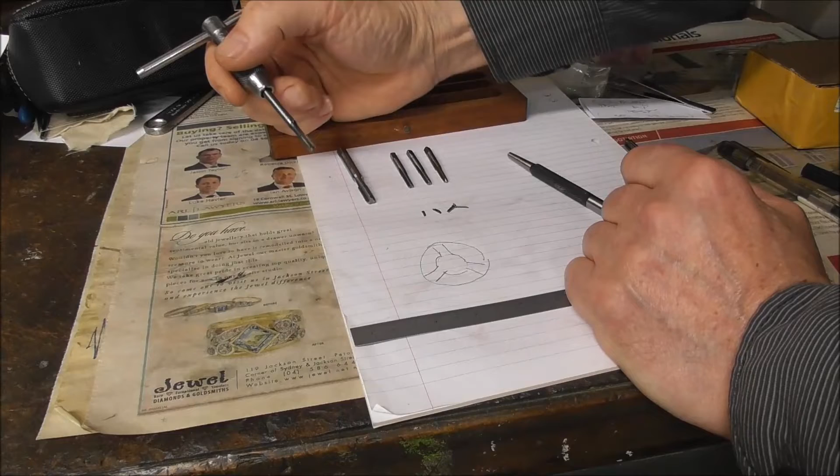Okay, so let's say you've broken a tap, disaster of disasters, and you want to get it out before the boss finds out. The first thing you want to try and do is unscrew it. Obviously, the bigger the tap, the more chance you've got of that.

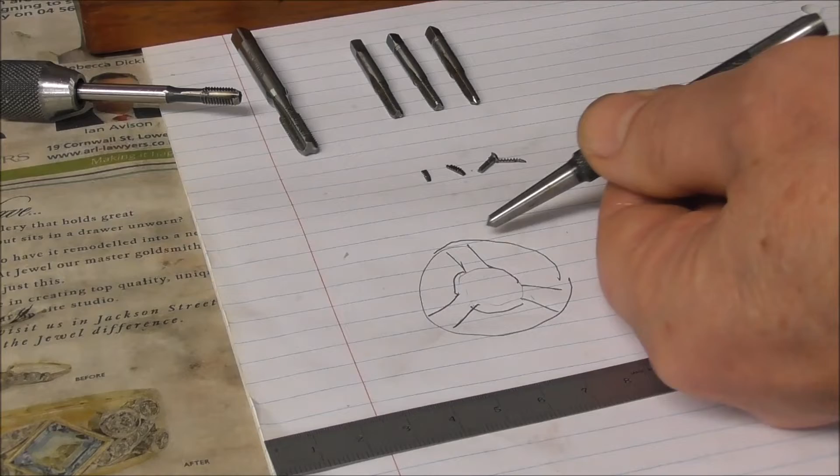So get something like a center punch, let's zoom in on this a little bit, and try and shift it. Just try and tap it at that point there, on each of the flutes, and see if you can turn it. If you can move it, that's a good sign. There's a chance you'll be able to unscrew it.

And if you can move it and it's up near the top - but obviously if it breaks deep down inside the thread and it's well below the surface, you're in serious trouble, and you've either got to throw the part in the trash or get it spark eroded out.

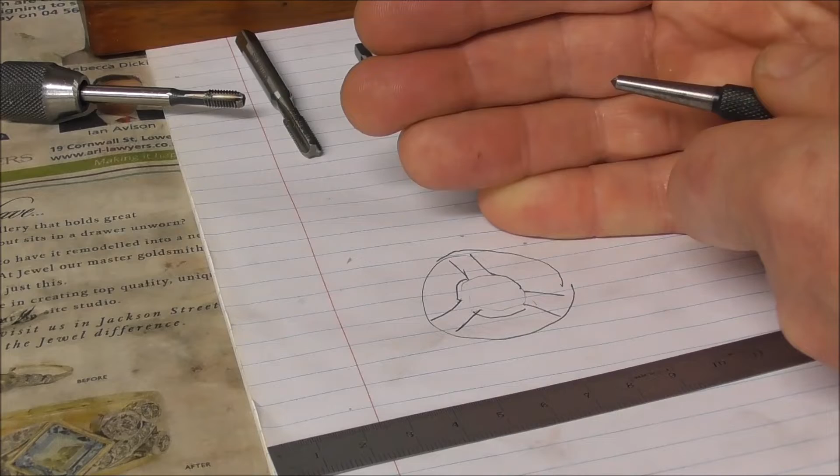But let's say it's up near the top and you're able to shift it slightly, and you can see, well, this could come out. Then you can make a little unscrewing tool. You can actually buy these.

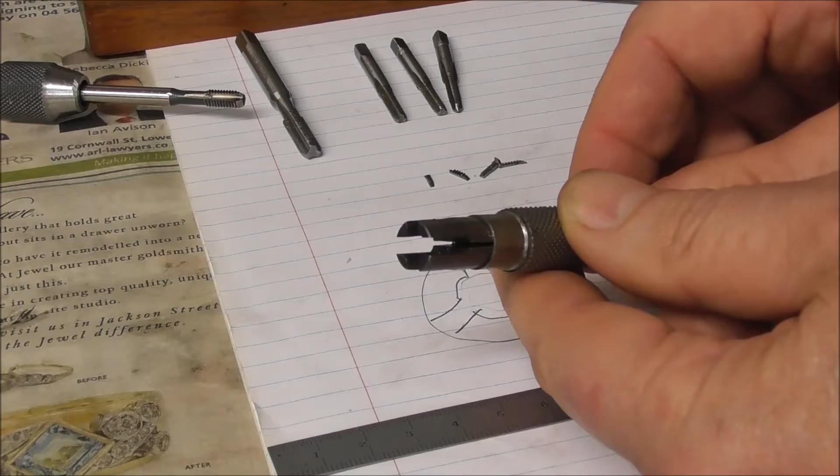I don't know how readily available they are, but this is a kit made by Walton Tools that is suitable for a range of 4 flute taps. You can slip this down into the gaps between the teeth and lock up the little ring, which tightens the collet onto it, and hopefully unscrew it.

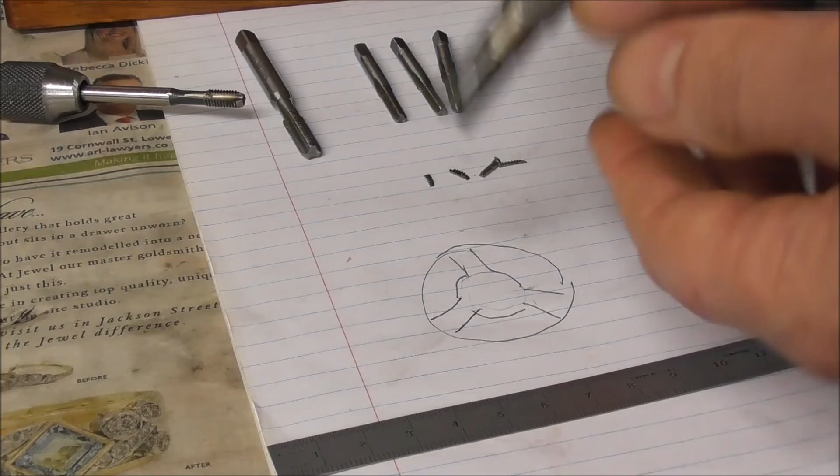But if the tap is below 1/4 of an inch in diameter, that's going to be a big ask and you might not be able to do it. But let's say it's a 1/4 inch tap, borderline, but it's a 3 flute tap.

Well, what you can do - let's see if I can show this here - is make a special extracting tool. Let's zoom in a little bit more. So what we have there is 3 little flutes that go down into the gaps between the tap.

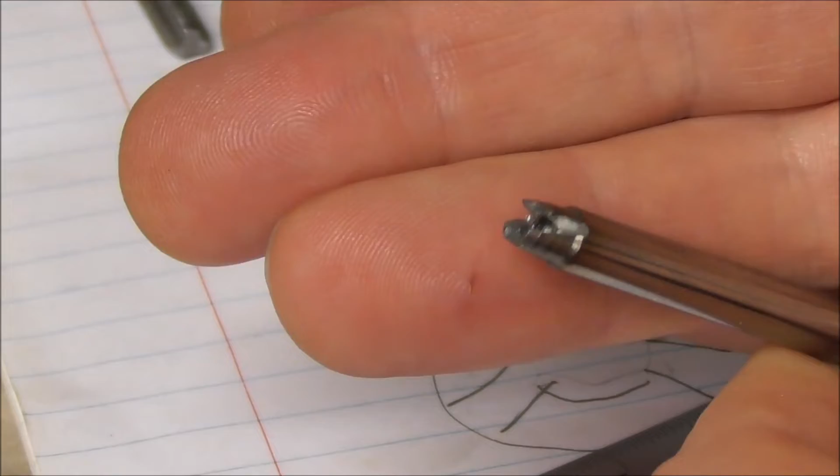Now, you can't just use any old material for this. It needs to be a very high tensile steel. You could possibly use a cap screw and turn it down in the lathe and drill a little hole, the core diameter of the tap.

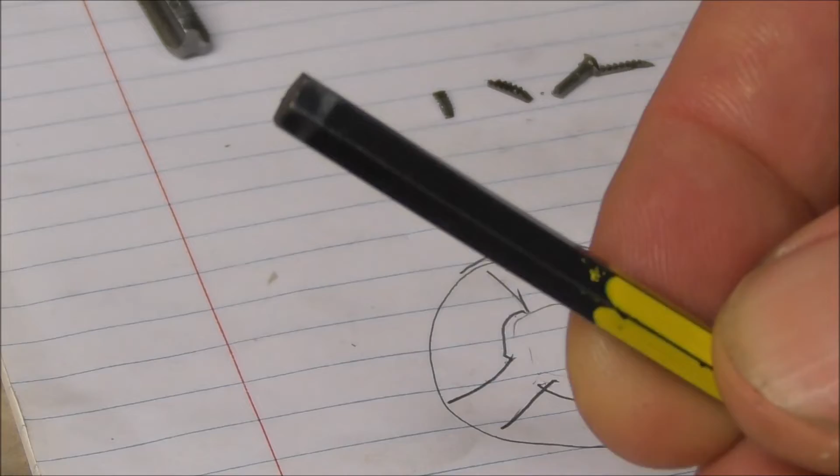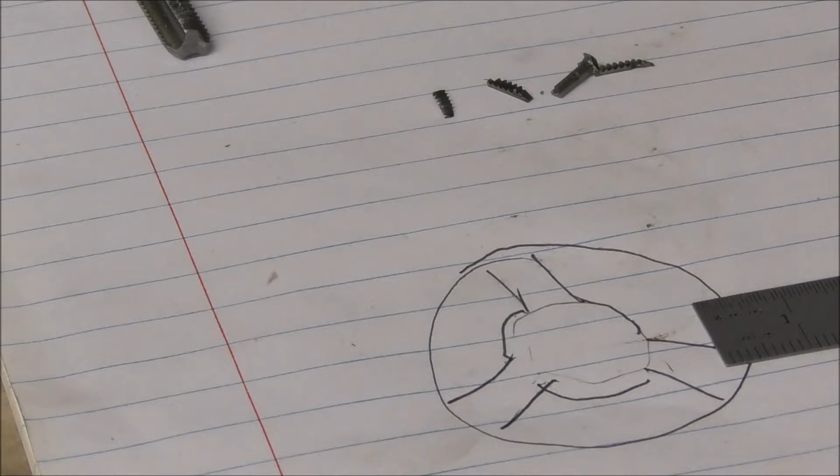But even better would be to get a piece of an Allen key - you call them hexagon keys or Allen keys. Cut it off in the grinder, put that in the lathe, turn it down to the hole inside the broken tap hole, drill a hole in the middle to the core diameter, and then file or grind little flutes so that you have a very strong steel tool that you can insert in around the broken tap.

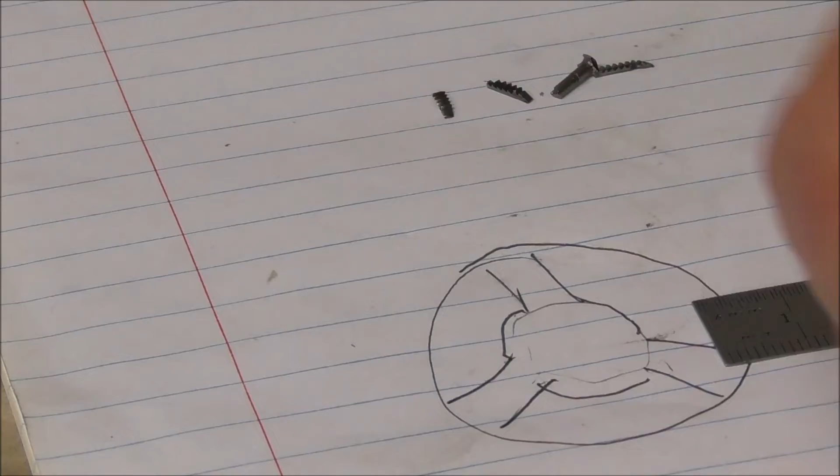Let's just show that now. What we've got we can show - here's a little 6mm tap, and there's a tool I've made to remove a broken tap in the past.

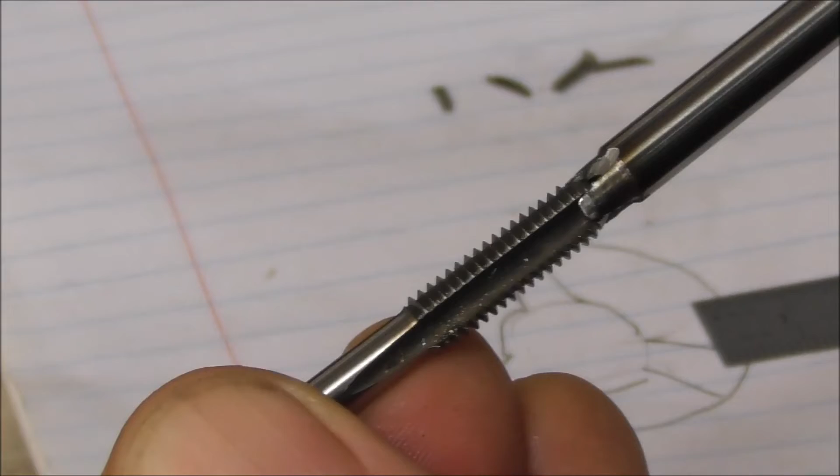Sometimes people bring me broken taps to spark erode out, and the first thing I do is have a go at removing it with an extractor like this. So if it's near the surface and you can tap it and get it to move, it's worth making a little tool like this and tapping it down well into the flutes and carefully, with a bit of downward force, unscrewing the broken tap out.

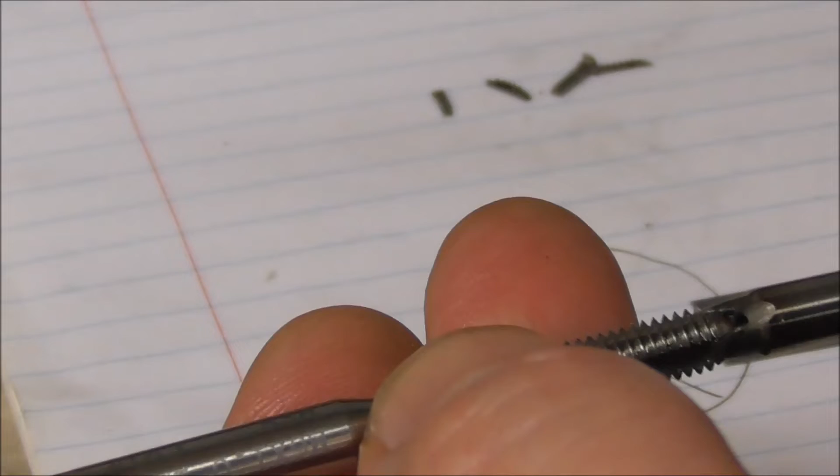And you may need to file or grind that with a little slitting saw or a Dremel to fit either a 4 or a 3 flute tap.

Now that won't work if it's a tiny tap of 3mm diameter, because the problem becomes exponentially impossible as these little flutes on your tool become weaker and weaker. But above about a quarter of an inch, it's likely that you could be successful.

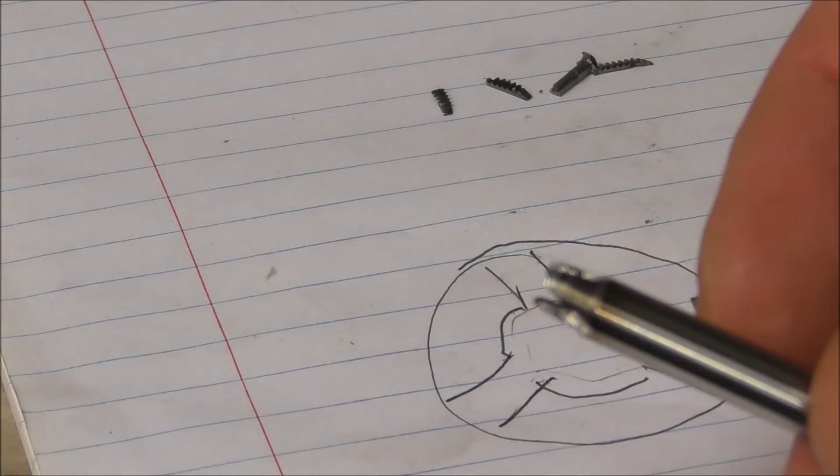Broken tap in an expensive part. It's a nightmare we all dread. We've all done it. I did it many years ago when I was learning the trade of tool making, and I broke a tap in an expensive die, and the lesson was so painful I've been careful ever since, and I don't think I've broken very many taps since that first painful lesson, because they're so difficult to get out.

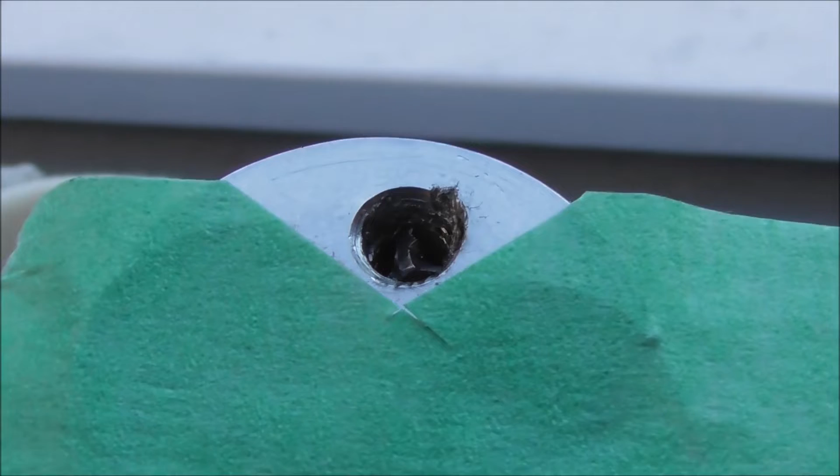This one is a 5mm tap broken deep down inside this hole. The client has brought the part in to have the tap removed because it's a valuable part and he wants to save it. I won't disclose the details of the part or the client because I'm not sure about the IP and I don't want to embarrass him anyway. But I'll go through removing this broken tap now, and it should be quite an interesting subject.

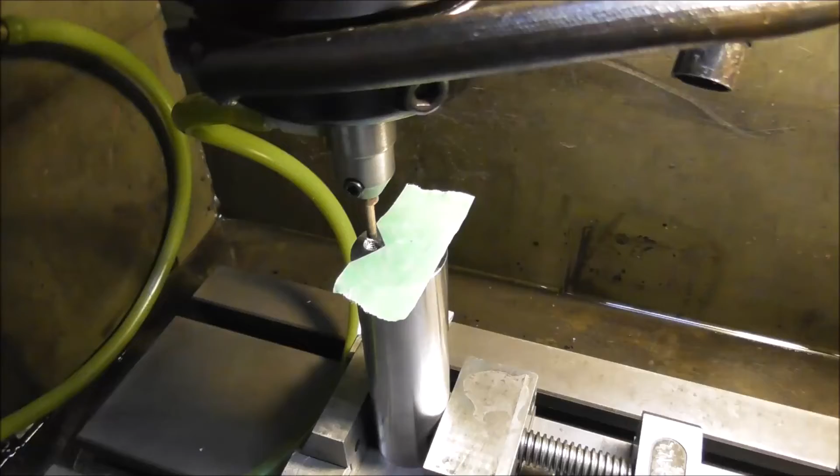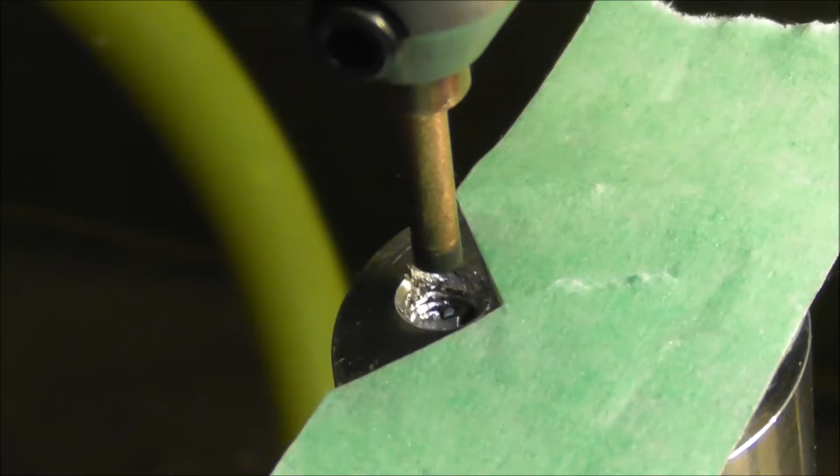Removing a broken tap with a spark eroder is actually not always an easy process. The idea is that you put an electrode in and erode down through the middle of the broken tap to remove the solid core, and then you can just flick the little broken pieces of tap out of the thread. That sounds really quick and easy, but the problem is that the tap's often shattered into little pieces, and as you move down, the little pieces become free and start to short out the tap and interrupt the spark eroding process.

And then you've got to retract the electrode and drain the fluid and try and remove the little piece of broken tap, and then go back to where you were and cut down another millimeter or two, and the process can actually take quite a long time. So I've got no idea how this is going to go. Alright, let's fire it up.

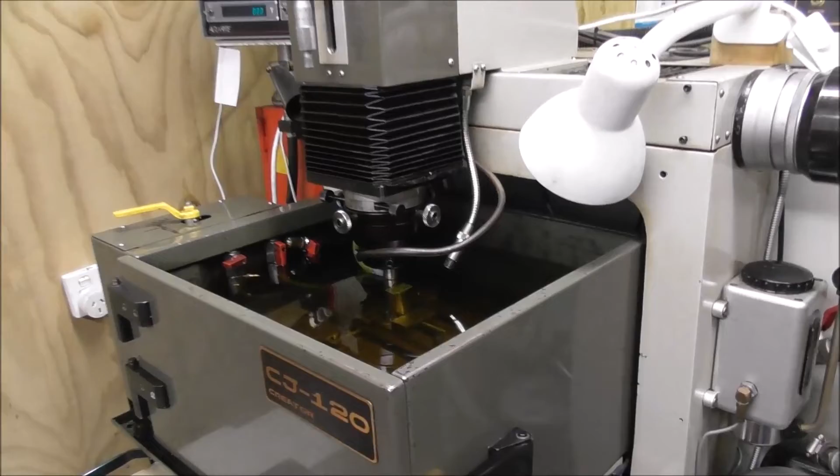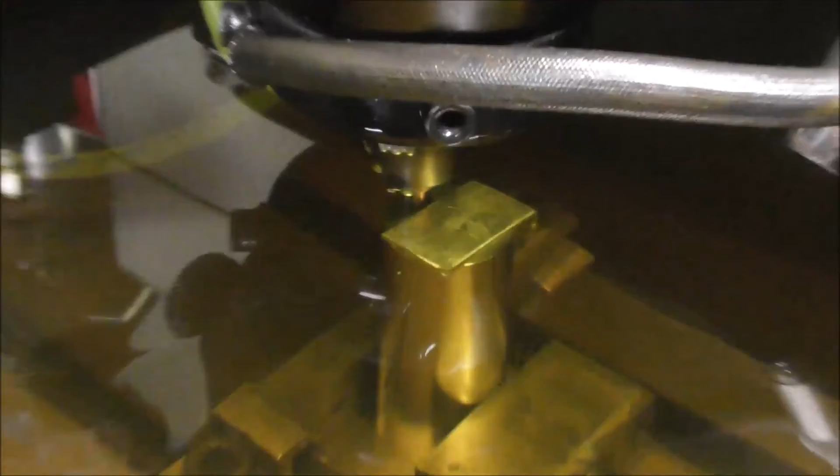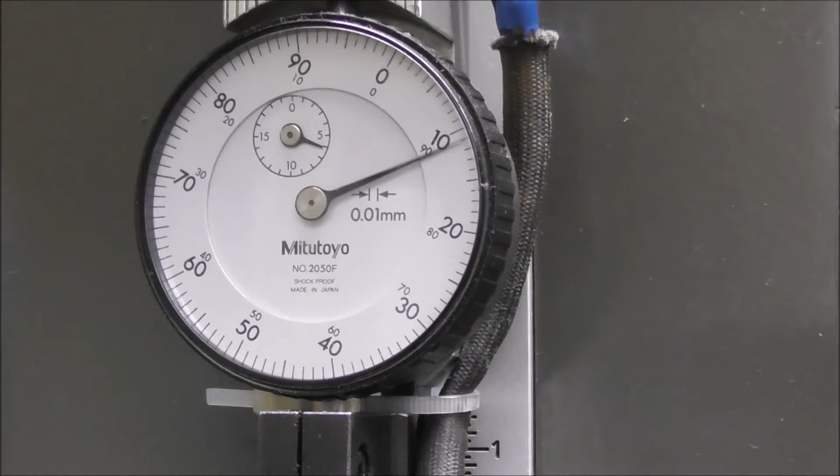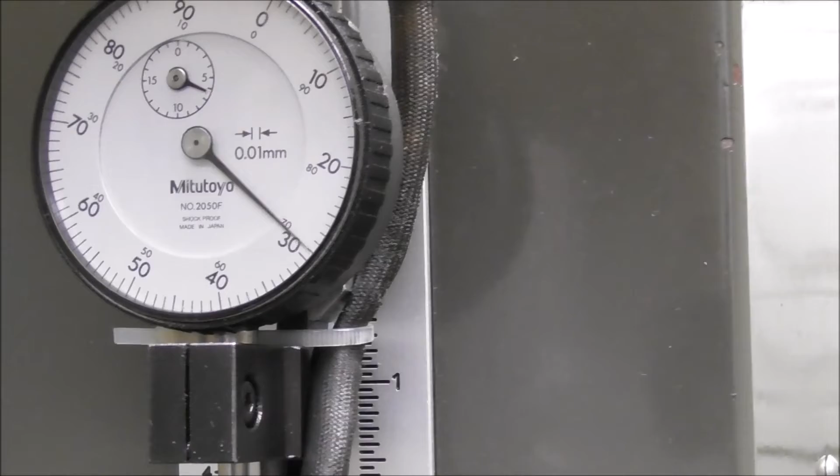Usually goes well in the beginning when the tap is fairly structurally sound. You can see the progress here on the dial indicator. It's not cutting too bad, it's progressing reasonably quickly. I've just got it on 6 amps, high voltage. Not getting too carried away because it won't take long to cut through if it goes well. It's all about whether or not the little particles of tap start to come free and short out the process.

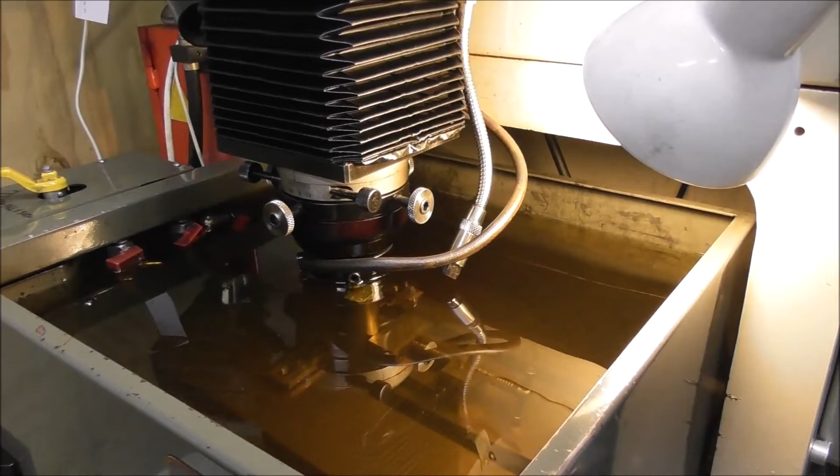Well, it's going really well, touch wood. It started shorting out and I had to pull the part out and blow it out with compressed air and try and flick out some little pieces of broken tap, set it up again, and it's been going really good now. It's gone down a long way. That's at 6 amps, 200 volts roughly. It's just starting to fault now. It might be breaking through the bottom, so I better have a look at it.

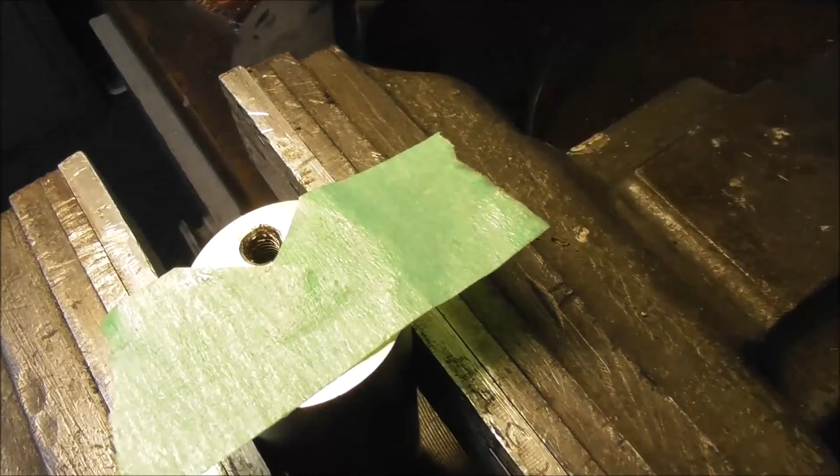Well, that went reasonably smoothly. I've got the threaded hole back now, and the thread is reasonably in good condition. There's a little bit of damage at the top where the mechanic tried to remove the broken tap with a center punch by the looks of it, but that's only down 1 or 2 millimeters, and then below that there's a good thread there. So that was quite successful.

It went quite smoothly. But you can't quote for a job like this. You daren't quote a fixed price. I just said, well, it just depends on how it goes, because it can literally take anywhere from half an hour to half a day to spark erode out a broken tap.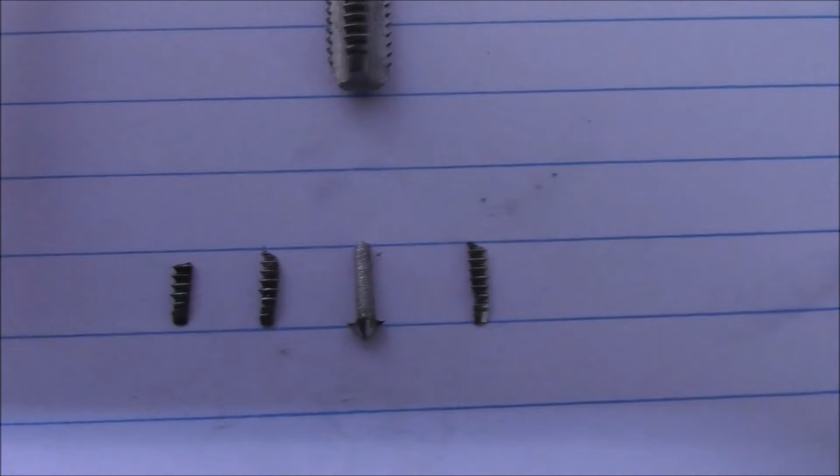So let's have a look at the pieces. There's the center core, and it's a 3 flute tap, and the 3 little segments of flute that I picked out of the sides. 3 flute tap, something like that.

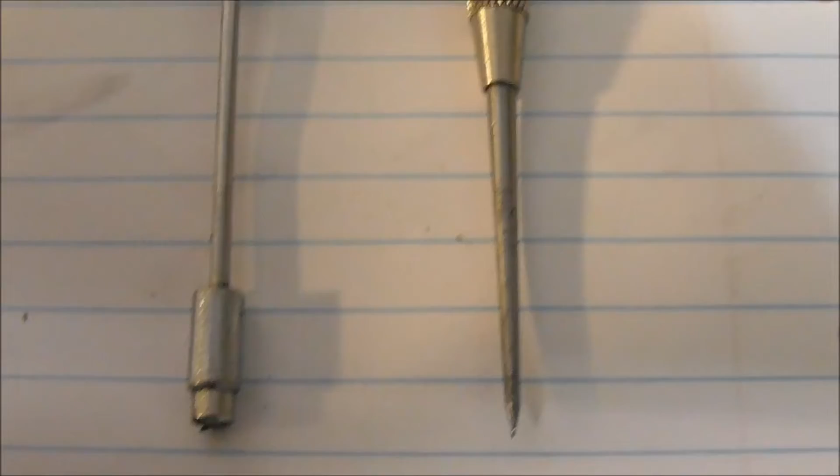Good tools to remove it are a scriber and a strong magnet, and obviously compressed air to get the little pieces out. I had to do that once and then go back down, although I don't think I actually removed them. I probably just shifted them enough to jam in place, and then allowed the spark eroding process to continue without them moving around again. But sometimes that doesn't go like that, and the little pieces flop around and short out, and they won't come out, and they jam in place.

As soon as you start eroding again, they start shifting and shorting, and it can be a real battle. You probably need to remove the part each time and set it up, and you're getting atomized dielectric fluid with the compressed air blowing in your face, and it's not a simple solution. It can go well, but it doesn't always.

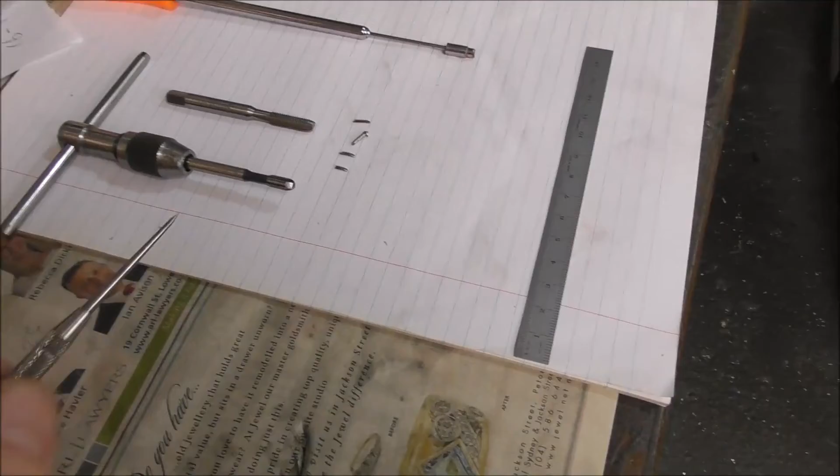While I'm on the subject, because I had to tap out the threaded hole to make sure it was clear - if you need to tap in that situation where there's possibly little pieces of hardened thread, or you need to tap hardened steel and you don't want to damage your nice new sharp tap, what you can do, and I've done this many times over the years, is get an old tap that's blunt and grind the end of it off, maybe a quarter of an inch off the end, just square off on the bench grinder until you've got fresh, clean cutting threads, and then grind a chamfer of about 30 or 45 degrees with a little bit of a back-off angle.

Can you see that there? So that it's got clearance. That sounds very crude, but if you're careful, you can grind an old tap back like that and it will cut like new. It will cut really well. And if you're struggling to tap a tough piece of steel, just do that with your tap.

Look at it closely with a magnifying glass. The cutting edges are likely going to be slightly rounded, and so what you're doing is not cleanly cutting the metal, but you're sort of trying to form the metal with a blunt edge, and that takes about 2 or 3 times as much torque to cut as it does with a razor sharp edge on the tap. 2 or 3 times on a borderline steel and a borderline tap will mean a broken tap.

So use just enough torque that you're comfortable with, and stay clear of breaking the tap. If the tap stalls and it won't go any further, remove the tap, look at it closely with a magnifying glass. If it's slightly dull on the edge, grind a quarter of an inch off the end and cut new chamfers with slight clearance on them so it's cutting on the cutting edge. Go back in, and with the same degree of torque, you'll find the tap with a bit of cutting oil will race ahead and cut cleanly, and you don't need to risk breaking your tap.

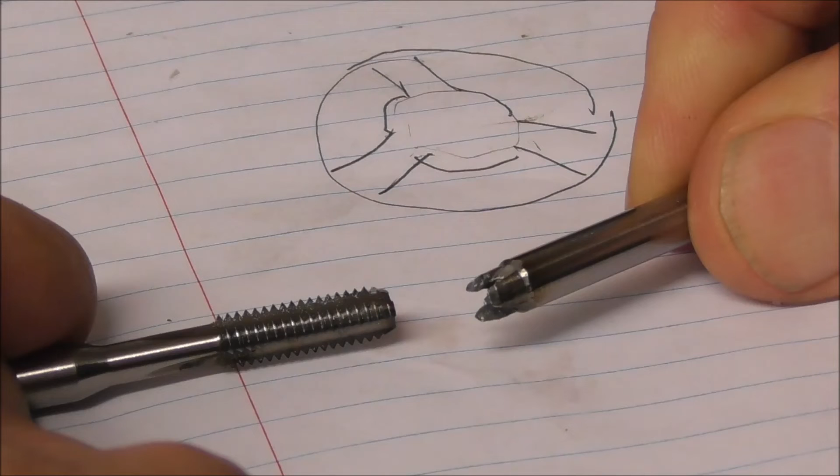You need to get the approach really carefully thought out. If the tap is seized in there and it's well below the surface and above a quarter of an inch, you can get it out with a very hard, strong, well-made extractor tool and the right technique, but it becomes increasingly difficult below a quarter of an inch - that's really what I should say.